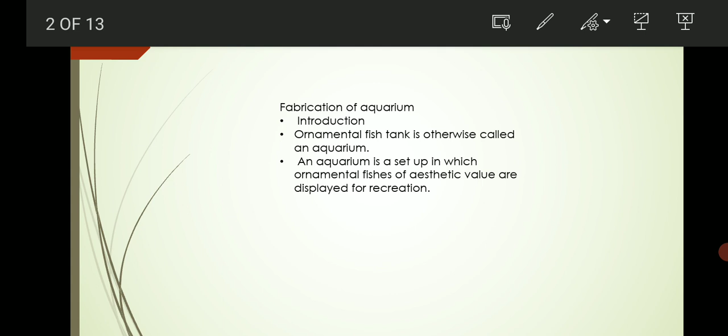Fabrication of aquarium. Introduction. An ornamental fish tank is otherwise called an aquarium. An aquarium is a setup in which ornamental fishes of aesthetic value are displayed for recreation. Fabrication of a glass tank.

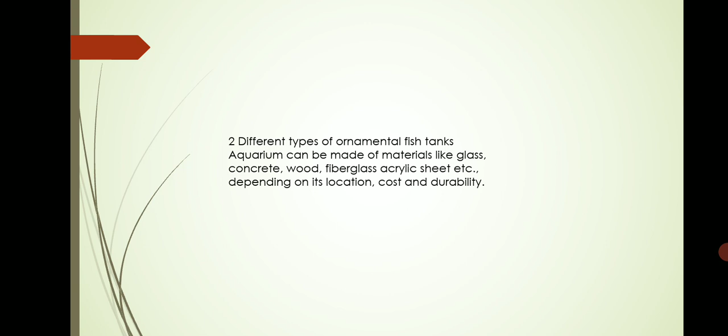Different types of ornamental fish tank aquariums can be made of materials like glass, concrete, wood, fiberglass, acrylic sheet, etc., depending upon location, cost and durability. Glass tank. They are either all-glass tanks or metal frame ones. In the metal, steel or iron frame tank, glass panes are held in place with a putty

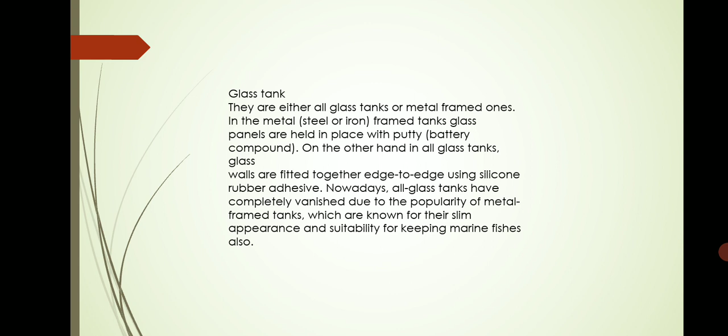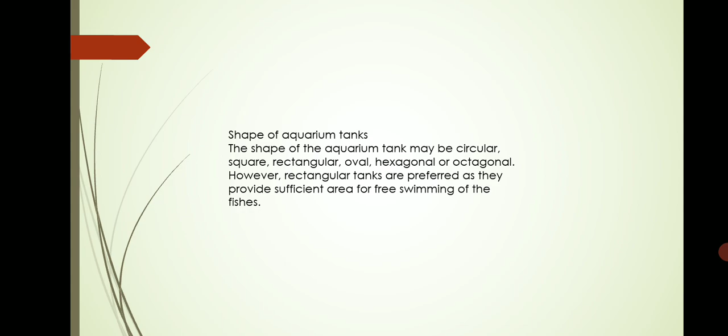Shape of aquarium tank. The shape of an aquarium tank may be circular, square, rectangular, oval, hexagonal, octagonal. However, rectangular tanks are preferred as they provide sufficient area for free swimming of fishes. Material required for construction of a tank: glass panes, 5 numbers, of the required size, silicone gel, squeezing gun.

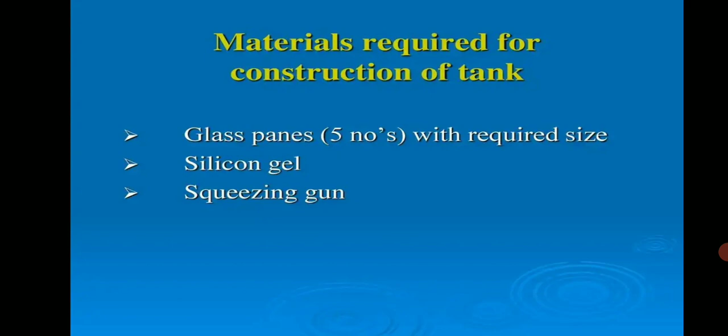Construction of all-glass aquarium tank. These are constructed with only glass sheets. Rectangular all-glass tanks are made with glass walls 5 to 10 mm thick; the cut glass walls are fitted together with a synthetic rubber sealant called silicone gum.

Prior to the fabrication of a tank, the side walls of the tank are arranged so they have the desirable shape. Glass walls are tied with a rope in order to keep the correct shape of the tank. Then the bottom sheet of the tank is kept flat below the arranged side walls so as to get the desired and correct shape of the tank. A cut thermocol sheet is kept at the bottom to rest the temporarily tied glass sheets.

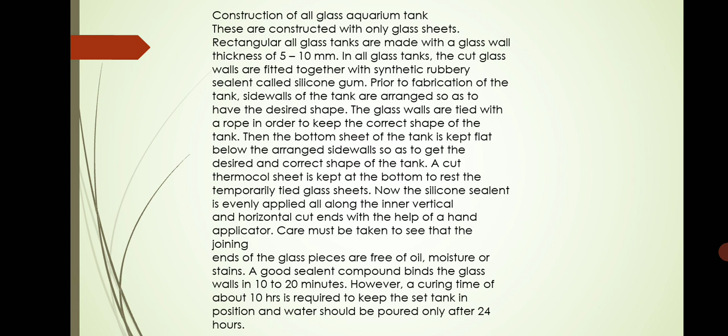Silicone sealant is evenly applied all along the inner vertical and horizontal cut ends with the help of a hand applicator. Care must be taken to see that all the joining ends of the glass pieces are free of oil, moisture and stain. A good sealant compound binds with a glass wall in 10 to 20 minutes. However, a curing time of about 10 hours is required to keep the setup in position. Water should be poured only after 24 hours.

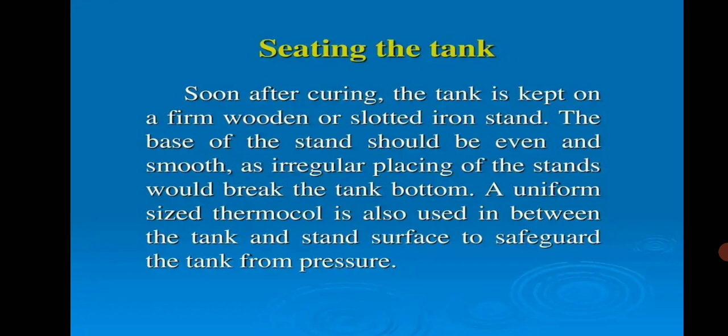Seating of tank. Soon after curing, the tank is kept on a firm wooden or slotted iron stand, and the base of the stand should be even and smooth. Irregular placing of the stand would break the tank bottom. A uniform size thermocol is also used between the tank and stand surface to safeguard the tank from the pressure.

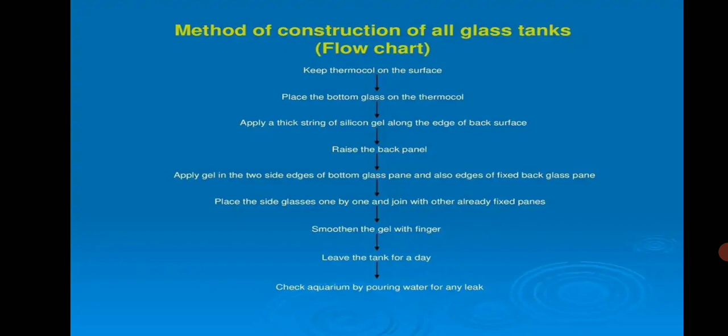Place the side glasses one by one and join with the already fixed panes. Smoothen the gel with a finger and leave the tank for a day. Check the aquarium for leaks by pouring water.